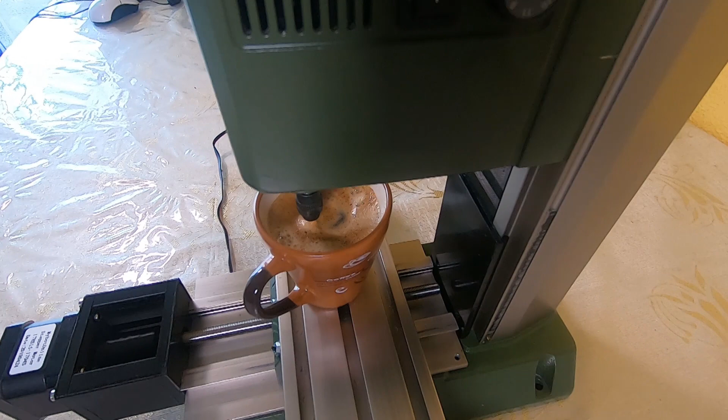Welcome back everyone for the second part of my Proxxon MF70 CNC conversion. If you haven't watched the first part where I did the Z-axis, go have a look right here.

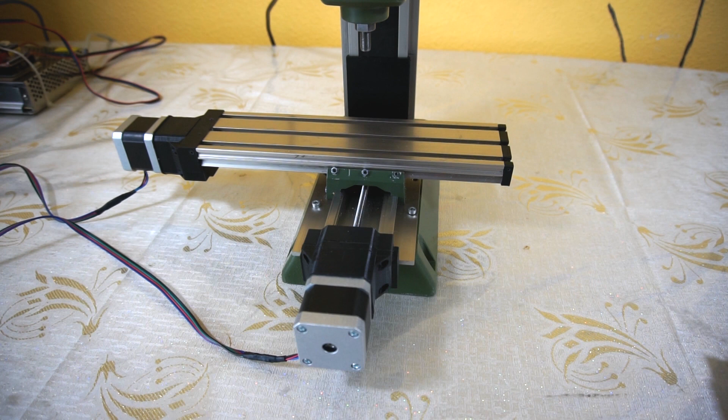What is this work of art, you might ask? It actually looks kind of like Proxxon's own official CNC conversion kit. In reality, it has nothing to do with that. Well, let me show you. Yes, this is a planetary drive. I've created it myself, starting from a model I found on Thingiverse.

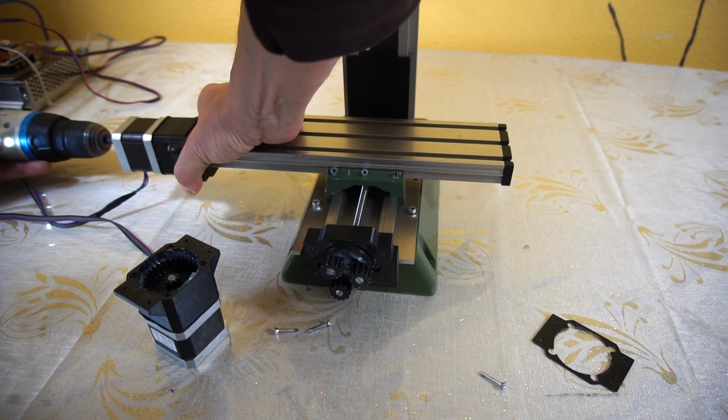Somehow I thought that I would be able to get a bit more torque from the NEMA 17 stepper motor and avoid all the skipped steps that I sometimes got. Long story short, the precision was garbage and all the torque I thought I would get from the 5-to-1 reduction was lost in friction and binding between the gears. I'm almost sorry for all the high quality grease that I wasted to pack the gearbox.

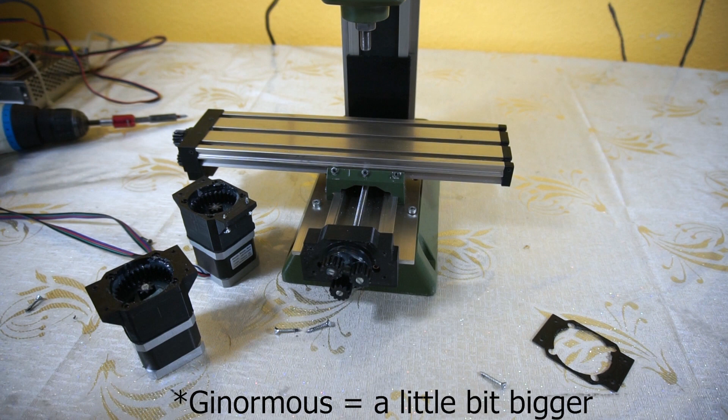But before we proceed, if you think this XY table looks ginormous, indeed it is. Story is, when I bought the milling machine, it came with this engraving pantograph. Very beautiful piece of equipment, nicely crafted, useless in practice. With all the flex and play in the mechanism, it just never worked.

And since I didn't pay for it from my own pocket, I had no trouble cannibalizing it for the bigger table, especially in the Y travel, which is just ridiculously small in the original model. I now get 83 millimeters of Y travel instead of the original 46 millimeters.

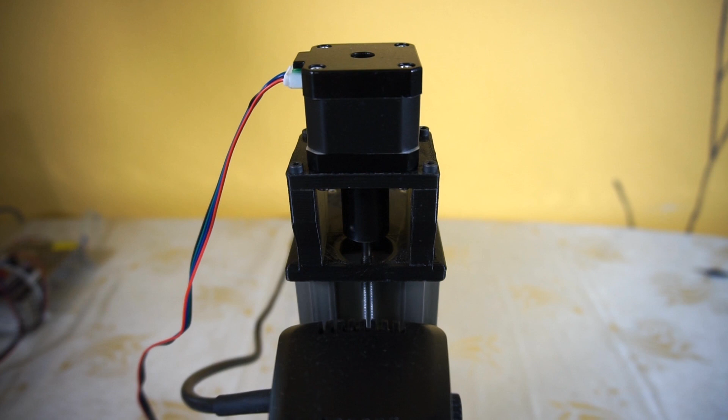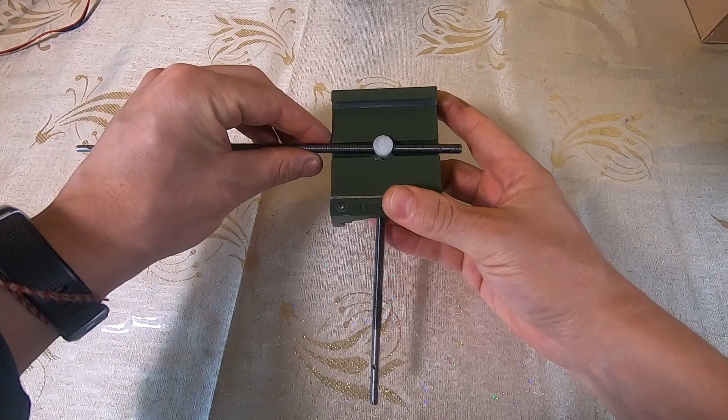Now, back to our project. I would like to follow the same principles I used on the Z-axis, meaning the stepper motor becomes the fixed point of each axis. The lead screw is coupled rigidly to the shaft of the stepper motor. Make my own 3D printed nut to replace the original one which is allowed to rotate in its seat.

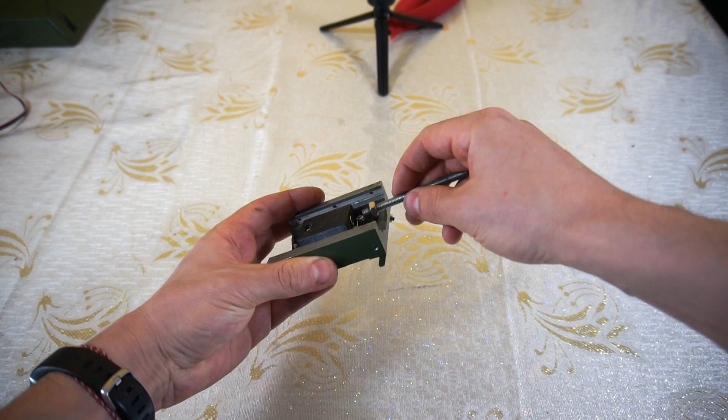Here is an anti-backlash system which is available on Thingiverse. It uses two classic nuts separated by a spring. I've tried it and didn't get much luck with it. To get a meaningful anti-backlash effect from the spring, the force it exerts on the nuts makes rotation difficult.

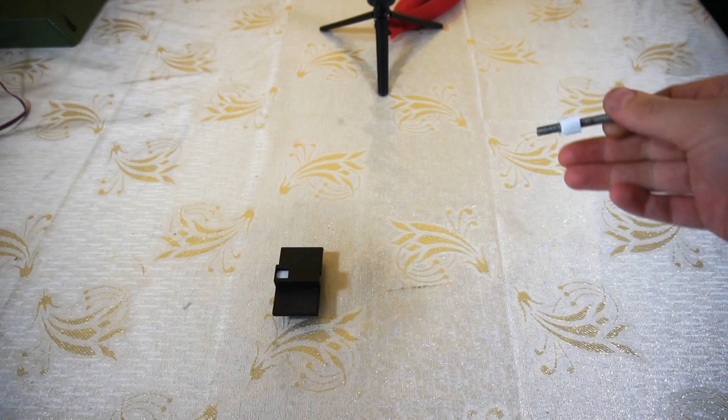I even tried my own variation with two nuts made from Teflon, which you saw in the previous video when I straightened the lead screw. Well, it still doesn't rotate easily. This system requires you to make a cutout in the original cross carriage. Since I already did this, I'm going to use this same model as the starting point of my own version.

As I did with the Z-axis, I will 3D print the part and tap the hole myself for the lead screw. Mind you, the lead screw for the Y-axis is left-handed, so I had to buy a specific tap for this part.

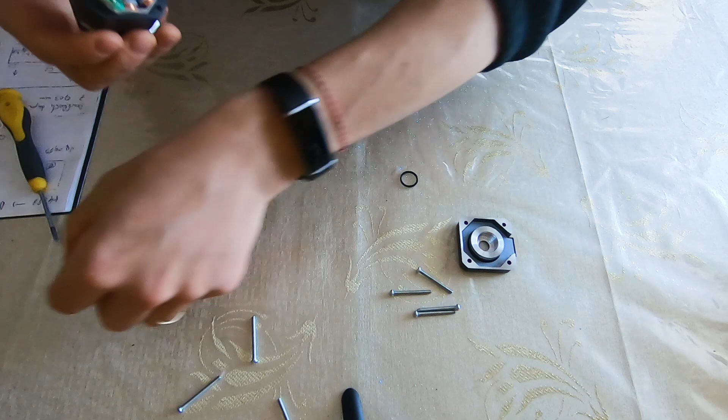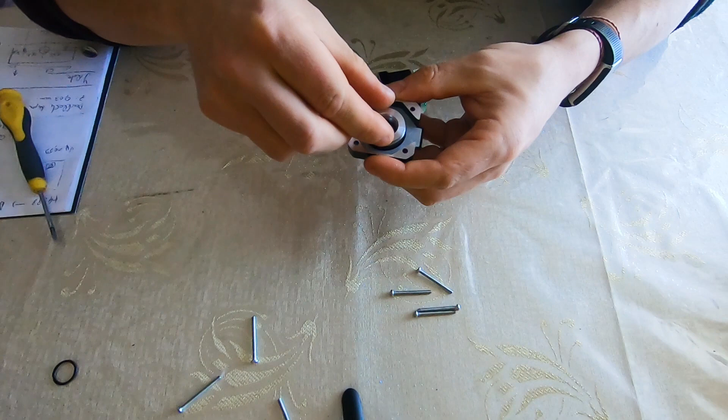Now, motors. As I said, this will be the fixed point of each axis. As I did on the Z-axis, I'm replacing the wave washer inside the motor with a solid one which I 3D printed to the exact right thickness. And yes, the play was different for each of the three motors.

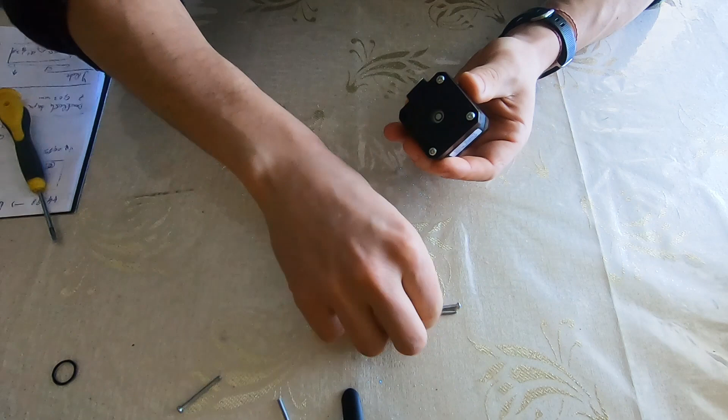As I did with the Z-axis, I'm using the exact same coupler which I 3D printed to make a rigid connection between the motor shaft and the lead screw.

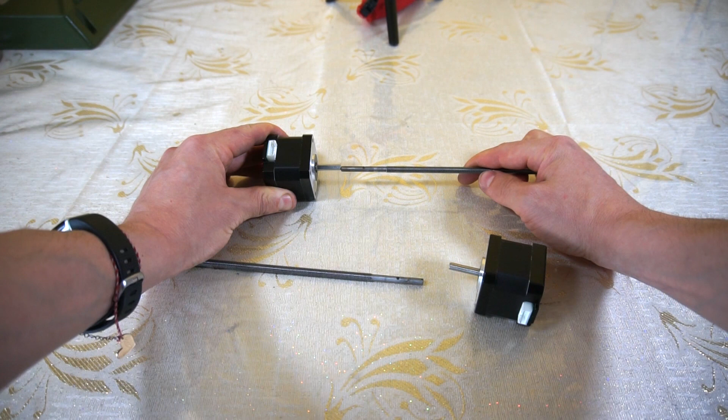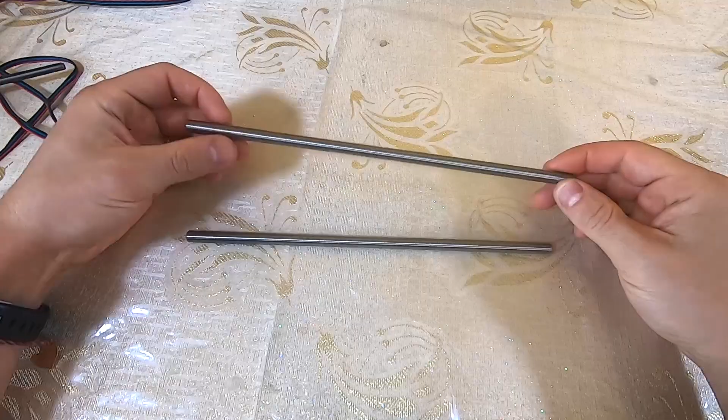It looks like it's not going to be easy. I was going to continue the project in this direction when, look what the cat dragged in. These are 8mm Acme lead screws which I ordered from eBay a few weeks ago and they just arrived. They are 1mm in pitch, single lead, and

since I'm going through all this effort, I thought perhaps I should do a more thorough upgrade and replace the original metric lead screws with trapezoidal ones. Just a quick side note about the advantages of a trapezoidal thread profile over the metric thread when used in a lead screw. The forces transmitted between the lead screw and the nut follow a line perpendicular to the surface of contact between the two.

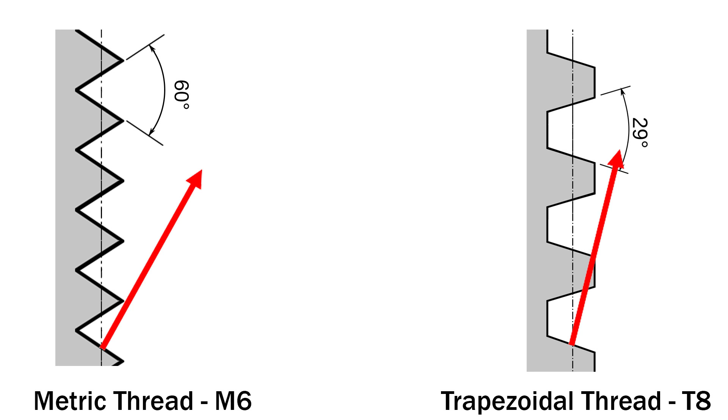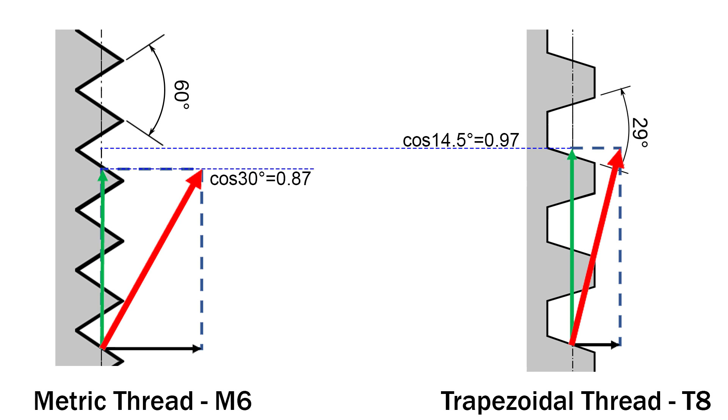The useful component of this force along the direction of travel, in green here, is proportional to the cosine of half the angle of the thread. So in the case of a metric thread, more of the force is transmitted laterally and the useful component is smaller than in the case of the trapezoidal thread. So a small advantage to be gained here, and with the NEMA 17 not being the beefiest of stepper motors, every bit of help counts.

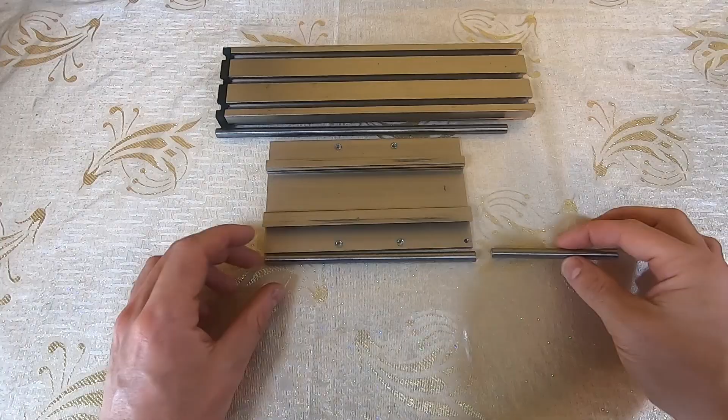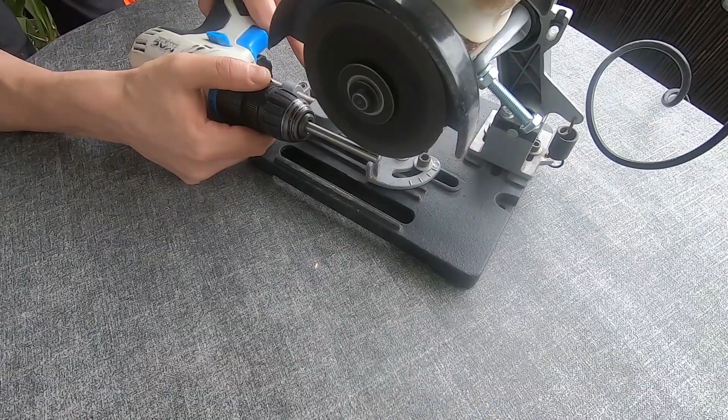Now, all I need to do is find a trapezoidal TR8 tap and continue the project. Now, all I need to do is make a TR8 tap and go on with the project. Once cut to length, I can use the leftover from the lead screw to make my own tap. I saw this in a few videos on YouTube, and since it will be cutting plastic, it shouldn't be too difficult.

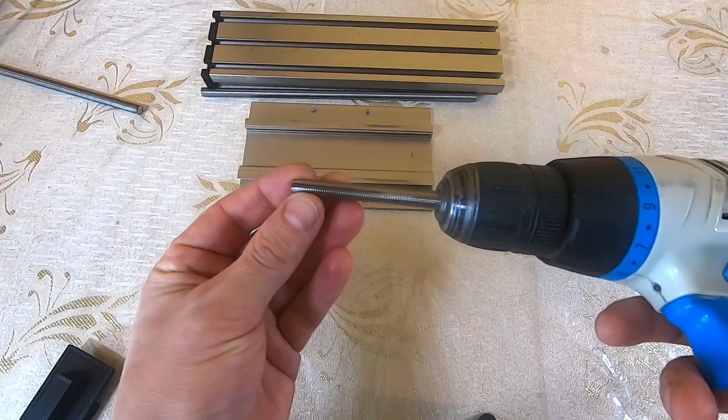There are better ways of doing it, I'll admit. I just have to cut the gutters along the length and some relief at the front, plus a little bit of cleaning, and it should work. It doesn't look great, but let's see if it does the trick. Well, this was harder than it looks on the video. A lot of back and forth needed, I suppose because of the cutting teeth which weren't too well defined, but it turned out alright.

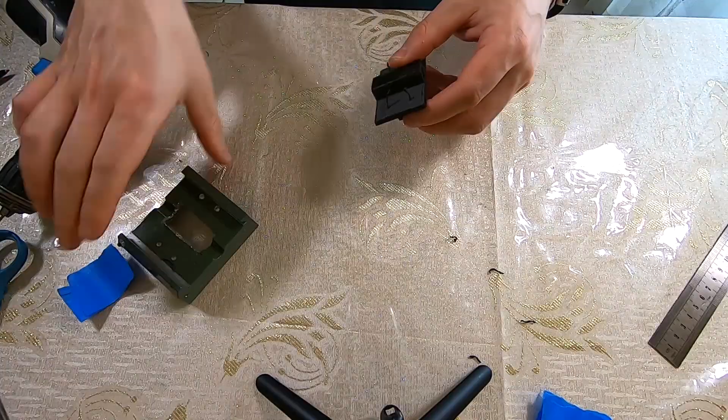Fixing the new cross nut to the carriage is not very obvious. I had to mark the holes and make them a bit larger to allow for a few small adjustments. In the end, the alignment is made by trial and error. It took me 3 tries to get the 2 screws aligned with the final position of the motors.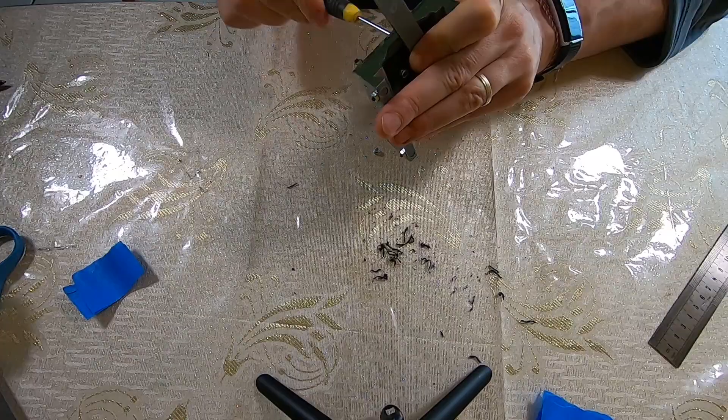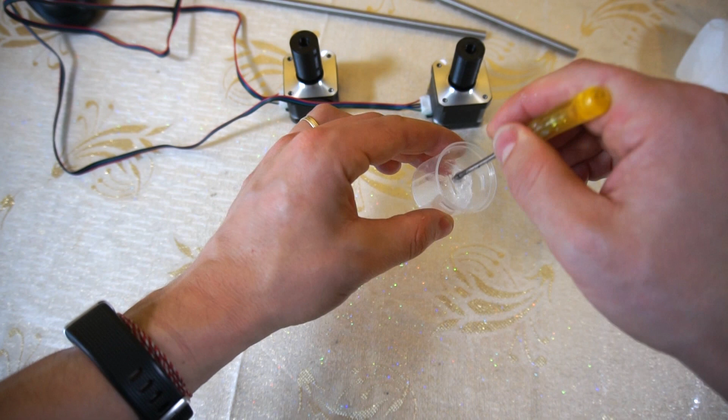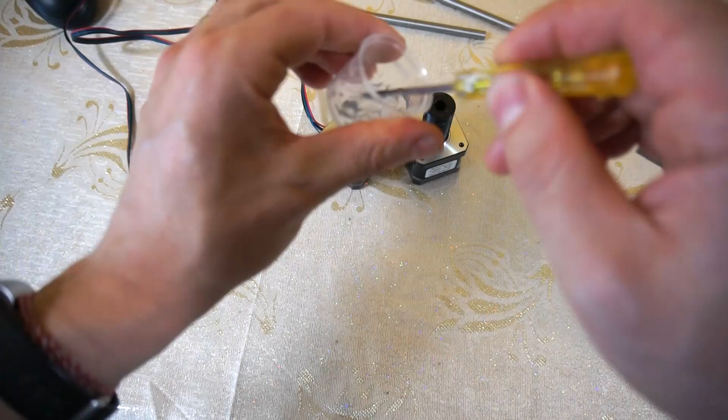Time to fix the lead screws to the motors. I've designed new couplers for the new 8mm diameter of the lead screw. Given that the lead screw is threaded on all its length, I have some trust issues when it comes to using just 2 set screws to hold everything together. So I'm going full overkill and using some epoxy glue inside the coupler.

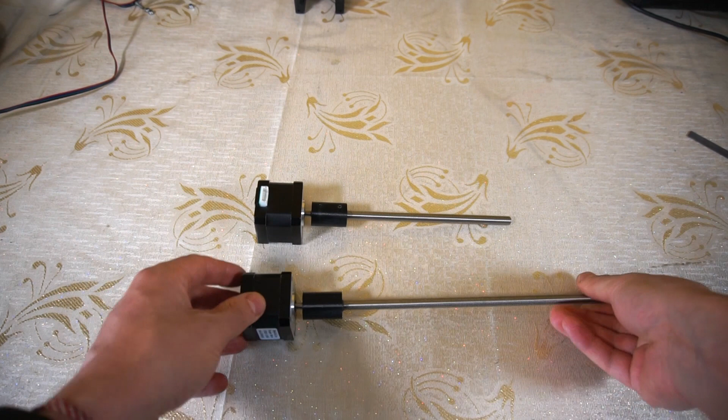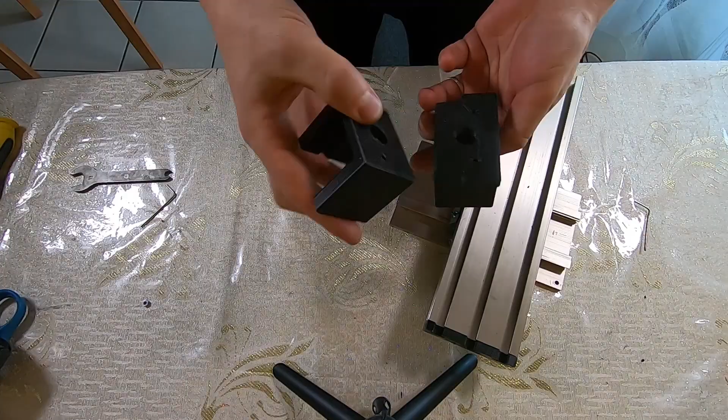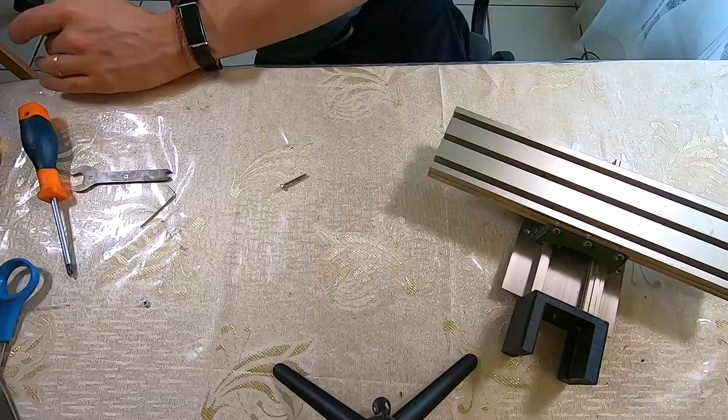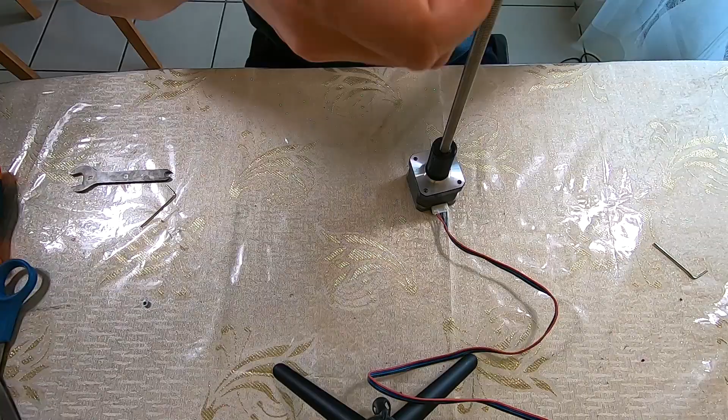The bridge between the motor and the table is made in exactly the same way as for the Z-axis, the only difference being that it will have the appropriate interface to be mounted on the X and Y axes respectively. Once printed, they can be installed on the end of each axis. Same with the motor, which will be mounted onto a separate plate and then installed on the bridge we designed earlier.

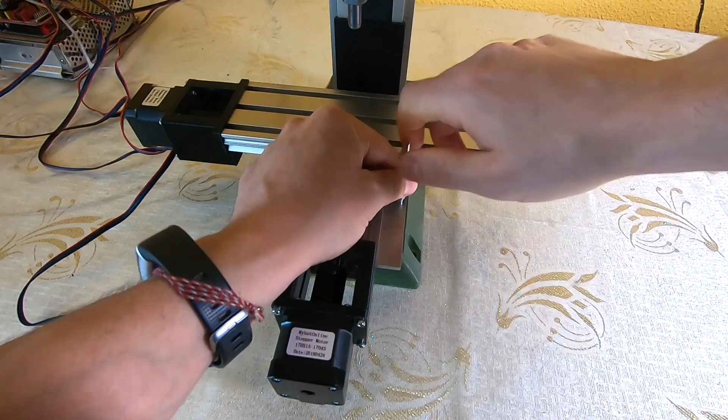It seems to move without any trouble. Time now to install it on the column base and complete this build. Let's give it the old micrometer test and see what's what. You will have to excuse the nature of my fixed point for this part. It was just the heaviest object that I had lying around.

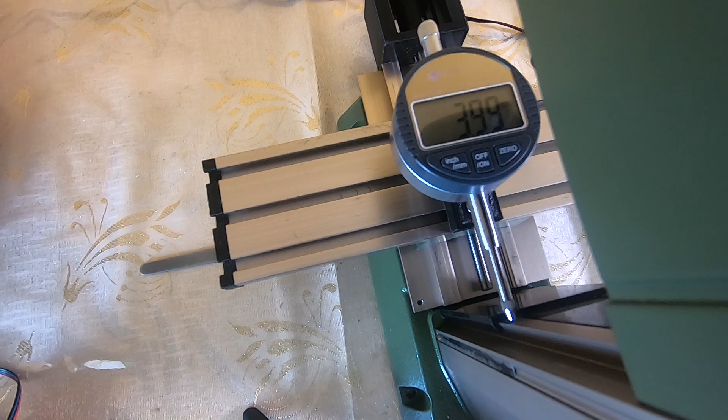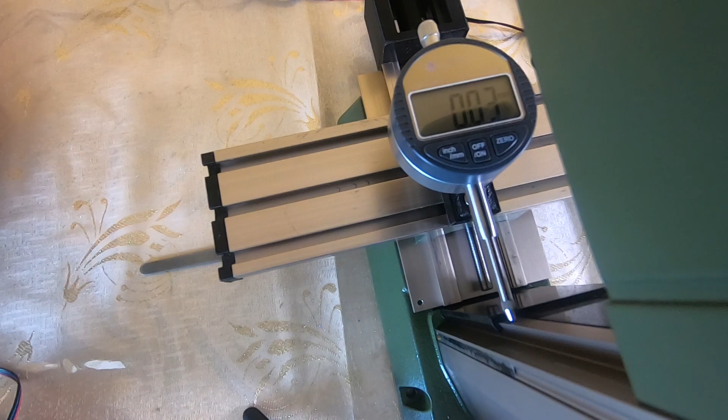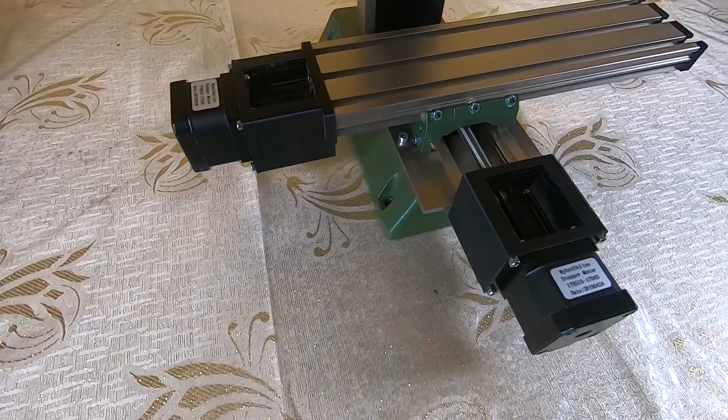So, between 0.02 and 0.03 millimeters, along with some other imperfections which I suspect might come from the table itself and the ever-present dovetail track. It looks like all this effort was not in vain. I'll put the files on Thingiverse in the next few days, maybe do a small video to wrap things up.